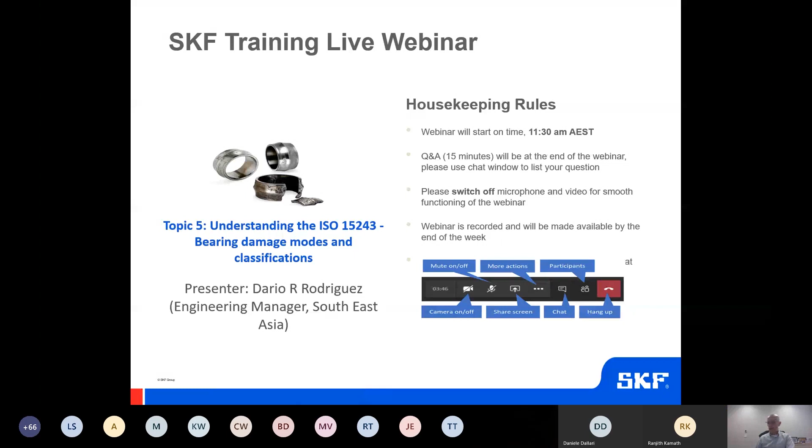Today we will have an introduction to bearing damage analysis, and we will use the ISO classification.

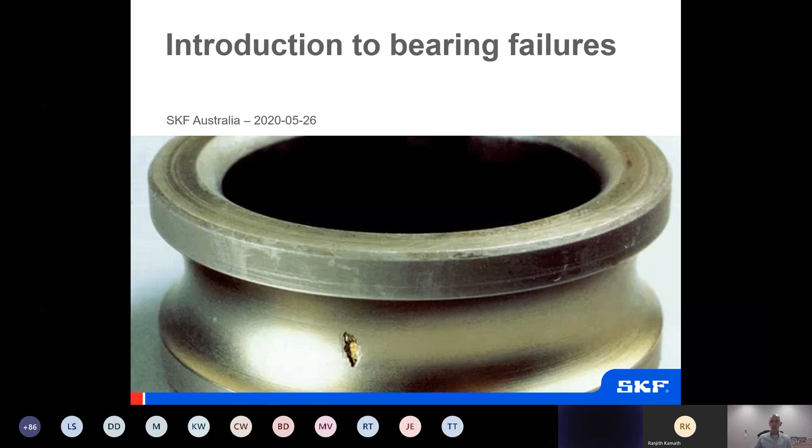When you look at bearing failures, I know this may sound a bit funny, but it's not a funny situation when you're facing failures on critical machines. This is basically one of many statistics you can see around regarding bearing failures.

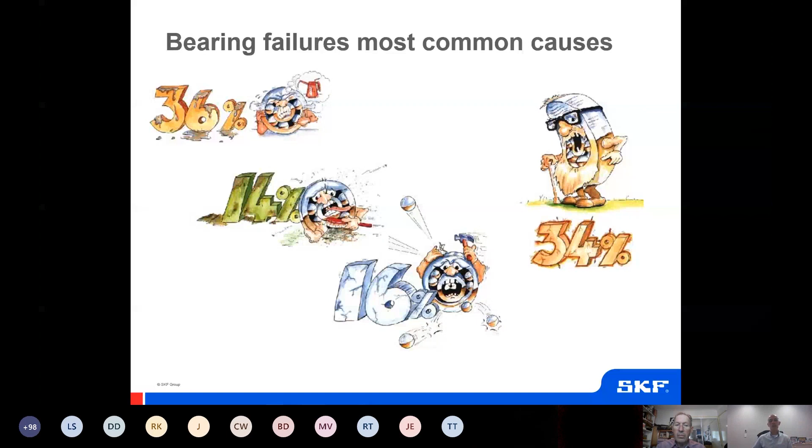Because of reasons other than the bearing manufacturing or its characteristics - whether related to lubrication, contamination, installation, and many other things. So there is a lot we can do to try to improve and solve some of these issues if we understand, when we look at the bearing, what is the most likely reason for the failure.

One of the things I want to be very clear about today, since we have such limited time, is that we won't be able to cover this as deeply and thoroughly as we'd like. But there are 2 takeaways from today's session. First, if it is too late, it's too late. Many times when we get bearings for analysis or investigation, the bearing is in such terrible condition that it's practically impossible to know how the failure started.

What we need to be aware of is that one initial failure will lead to a lot of consequential damage if you allow the bearing to continue to run. We all know that production pressure often won't allow us to stop the machine early enough when we detect the first indications of failure. But the longer we continue to run the bearing, the less likely we are to really understand what happened and what was the initial trigger. So that's one of the takeaways.

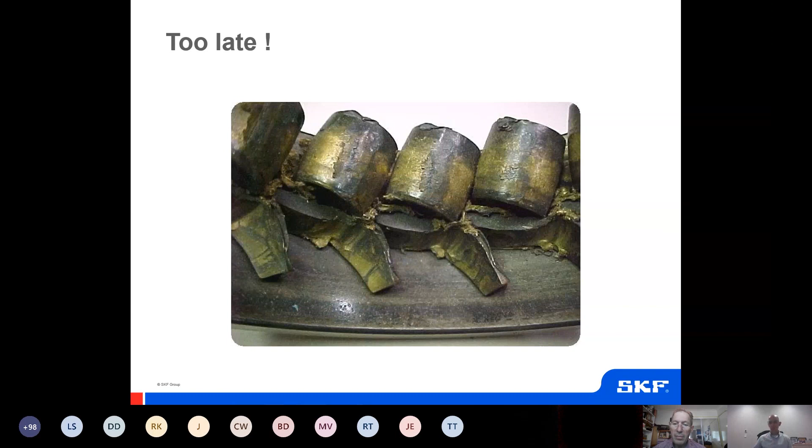You need to understand the bearing as part of a system, and many times indications or confirmations of a possible failure hypothesis can be found in the surrounding components. You need to look at the shaft, the housing, the seals - you need to look at the bearing as part of a system. Even when looking at one bearing failure on a motor or gearbox, that bearing is sitting on the shaft together with another bearing, most likely. You need to look at what happened with the other components, including the other bearing or bearings if there are more, because they might give you clues about what happened.

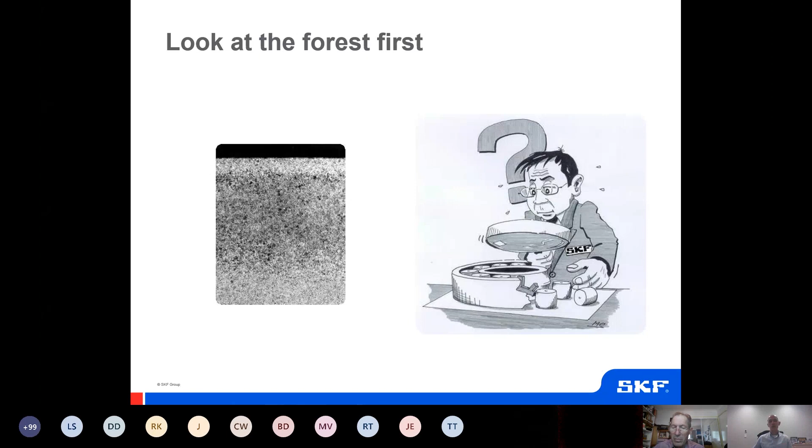One of the critical points to understand bearing failures is that you need to understand the bearing in itself, so you know what to look for. This sounds very basic, and you can say we can identify the bearing components and the different surfaces and features, but this is critical basic knowledge.

When you are looking at the bearing, you know what you are supposed to see and what might be considered normal, because when the bearing starts running, there will always be some kind of contact pattern between the rolling elements, whether balls or rollers, and the raceways, between the rolling elements and the cage, and between the rings and its supporting surfaces, the shaft or the housing.

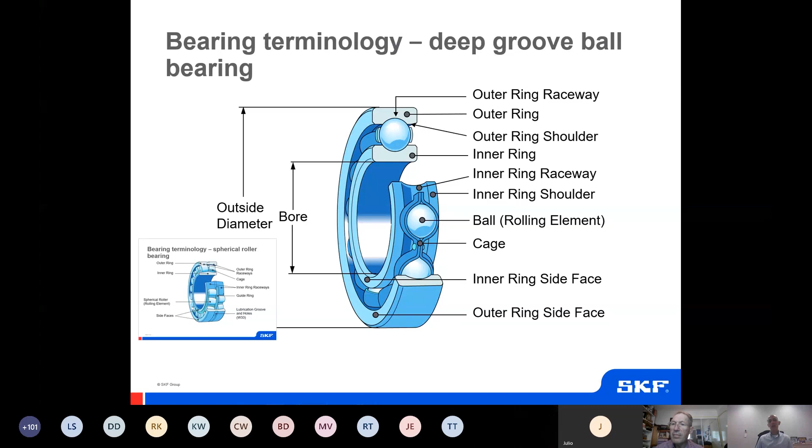So we need to have an idea of what is a normal contact pattern in which position, so we can then look at the bearing and see if what we are inspecting and evaluating makes sense in relation to what is the bearing design.

Different bearings have different numbers of components, so it's not enough to have a general understanding—sometimes even different manufacturers may have different design features. Even if the bearings look similar from the outside, they might have different internal features. You need to understand these differences to know what to look for, and again, what is a normal contact pattern from what is not.

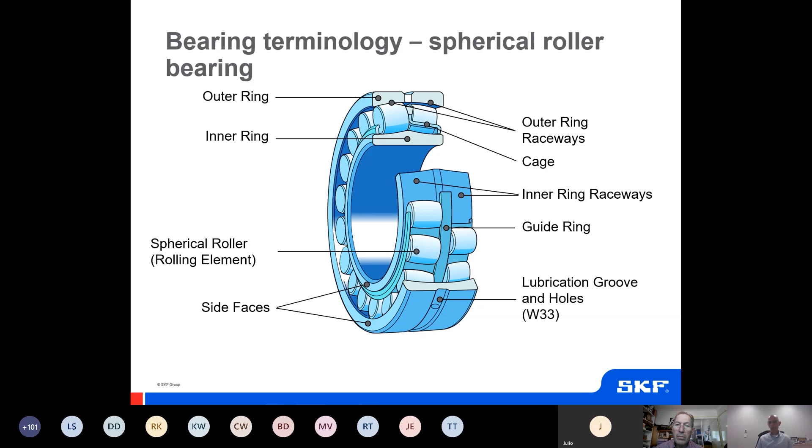This is an example of those features. You can have many different cage types, and even within the same bearing it might have different cage executions. What I mean is, they can have pressed steel cages, solid brass cages—what we call machined cages—or molded cages from polyamide and other synthetic materials. So that's one of the characteristics that you need to understand.

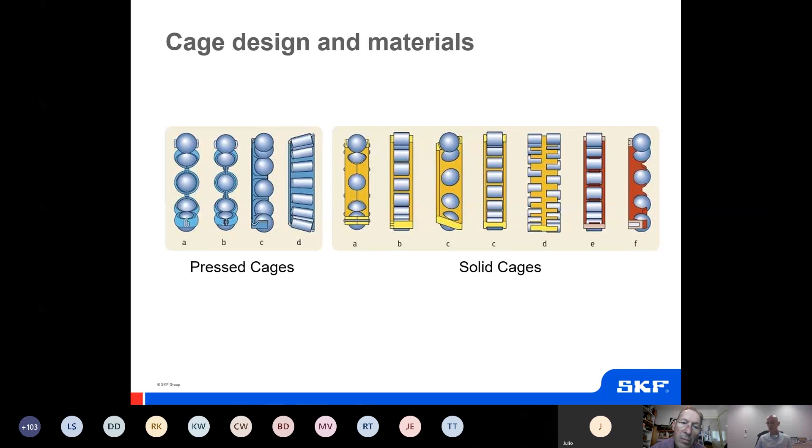Within the same bearing you can have different variants, and those variants may involve what is a cage execution. So it's not enough to know that the bearing has a brass cage—that brass cage in the same bearing can have different executions.

For example, it can be guided so the cage weight is supported by the rolling elements, meaning there should be no contact between the cage and the rings. That would be a small consideration when you see the cage—if there was contact with the surfaces on the rings, then there is an indication of a problem.

The same bearing can have an inner ring guided cage, meaning the weight of the cage is supported by the inner ring. There is of course some gap, not shown on the picture, but the weight of the cage goes around on the inner ring, or it can be guided on the outer ring. Those are features that are important to understand—again, what is supposed to be there, what is a normal contact pattern, and what is not.

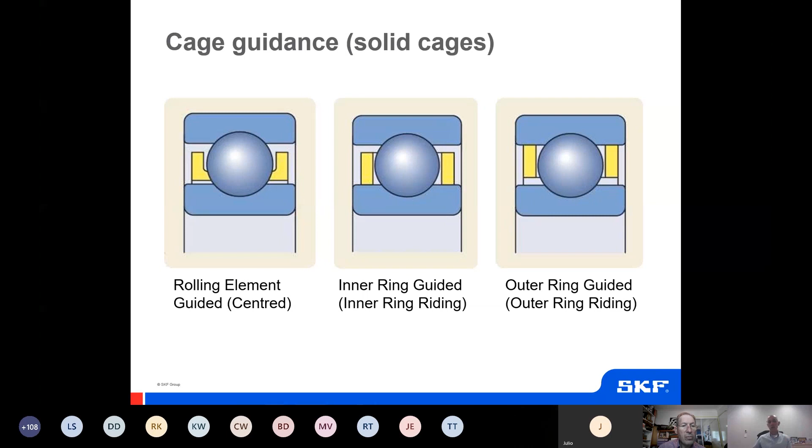Another consideration—and these are just a few examples of understanding your bearing and your application when looking at characteristics and features on a failed bearing—is that in most applications you will find a locating and a non-locating position.

This is also connected to what I said before, that you need to look at the bearing as part of a system. So let's say that you have a bearing that failed, and you think that one of the possible reasons for the failure is axial load being applied to the bearing.

If you look at the bearing in isolation, you need to answer—and might not be able to answer—whether that was the bearing in the locating or non-locating position, because the interpretation could be completely different. If you have an indication of axial loading on a bearing that is supposed to be non-locating, that's an indication that something is wrong, because that bearing is not supposed to take any axial load. So it's important to understand the bearing in the context of the application, to look for what is normal, what is supposed to be there, and what is not.

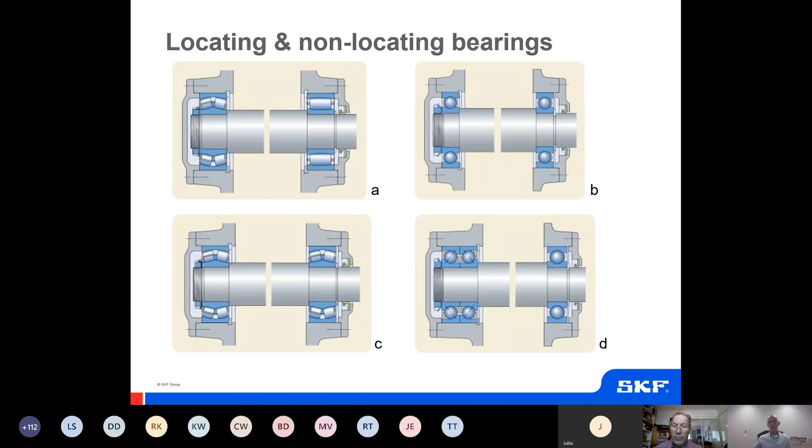These are just some basics, and I cannot go into more detail because of limited time. But let's look at some of the load patterns.

I was mentioning before that even under normal conditions, the bearing will develop some contact pattern under normal load, normal lubrication, in a normal environment. A typical bearing application might look like a rotating inner ring with a stationary outer ring, which means that with the remaining clearance inside the bearing, the inner ring moves around.

Do you see that? As soon as I put my...

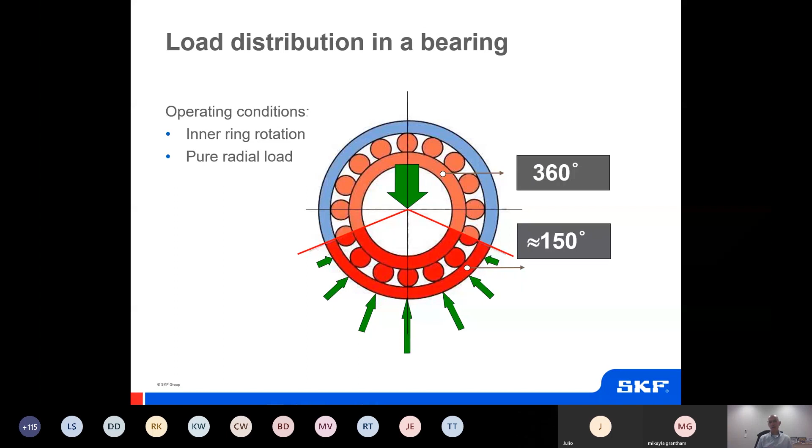I'll show just one example because of limited time. In this case, for that preceding condition, the rotating inner ring with a constant load direction, you will see that the contact pattern on the inner ring raceway of this ball bearing will cover 360 degrees. It will be centered because there is only radial load, no axial load being applied. So the contact should normally be in the center, and if it is not, that might be an indication that something is not as expected.

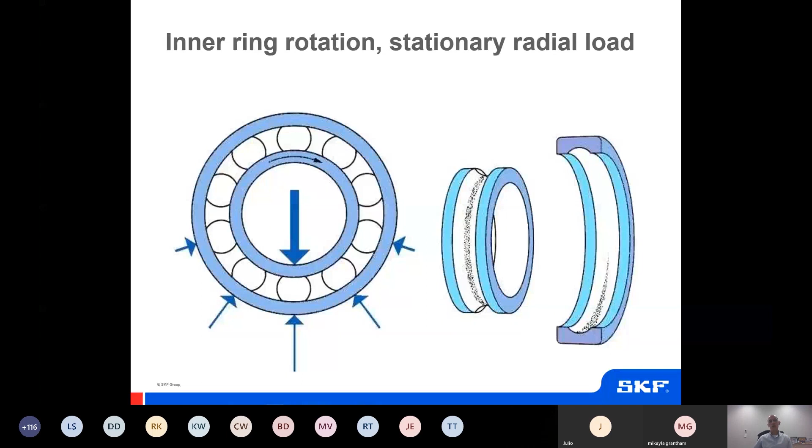And the outer ring, which is not rotating, should only have a contact pattern in the load area, which is not of constant width—wider in the area of maximum load and thinner as you move in or out of the loaded zone. So that is what is expected to be normal in an inner ring rotation with a constant load direction and a constant load. This is a very simple example of such a condition.

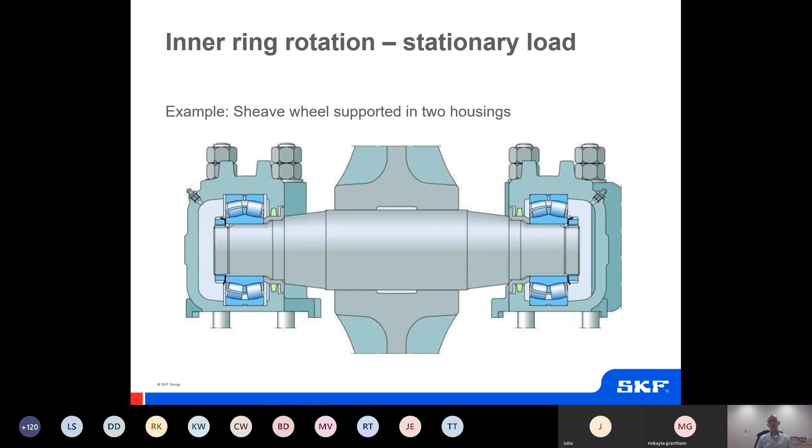So that's just one example of an application where you will see something like that. You can apply this kind of logic to any of your machines. Of course it means you need to understand the loading type and conditions—whether it's a constant direction, a changing direction, or a rotating load like in a vibrating screen. You need that understanding to connect it with the load pattern you see on the bearing. And there are many other possible situations and combinations, like outer ring rotation.

If you have outer ring rotation and a stationary inner ring, the logic will change—you will see a contact pattern all around the outer ring and only on one part of the inner ring. You can have a bearing supporting axial load and not radial load, like sometimes happens on a vertical shaft. But it can also be a dominant axial load on a horizontal shaft, and then the bearing supporting that axial load will experience a contact pattern all around on both rings.

You can have combined loads, more radial or more axial, and that will change the contact pattern on the inner and outer rings, also depending on which one is rotating and which one is stationary. This is basic, common sense, but we need these considerations to connect what we see on the bearing with the application.

And I highlighted in red here also contact patterns that apply to situations indicating a failure already—for example, when the outer ring of a bearing is misaligned with the inner ring. In those situations, you have an indication already in the contact pattern that there is a problem. When I'm talking about misaligned rings here, it does not mean misalignment between the driven and drive shaft. This misalignment can happen within the bearing itself, due to a lack of concentricity and coplanarity within the bearing, for example between the shaft seat and the housing seat.

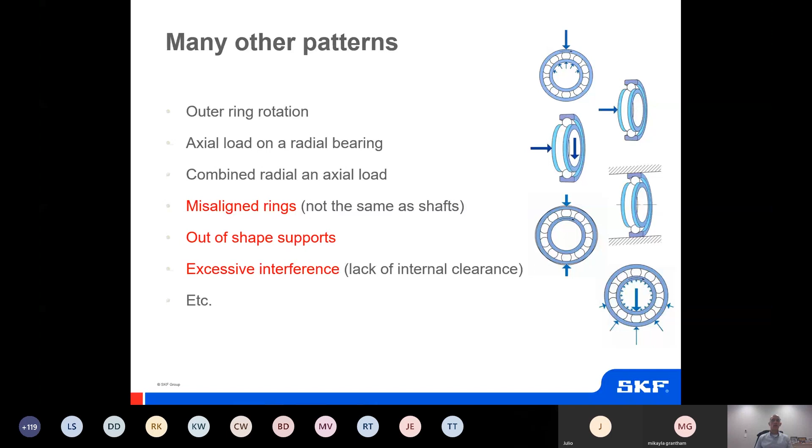So let's look a bit at this ISO 15243. The last edition is from 2017. This failure classification was developed, as happens with many other ISO committees, by participants of the bearing industry—ourselves, SKF, and other bearing manufacturers have representatives in this committee. There was a need to develop a common language, because customers were having different interpretations and different naming conventions for the same failures.

So the main idea of this ISO classification was to say there are a number of failures that can be identified with simple tools by visual inspection, without detailed material investigations or laboratory analysis, that we need to agree on how to call them. So when somebody makes an investigation and refers to a failure, others can understand what we are identifying. That was the main reason for this ISO failure classification, but by no means does this cover everything.

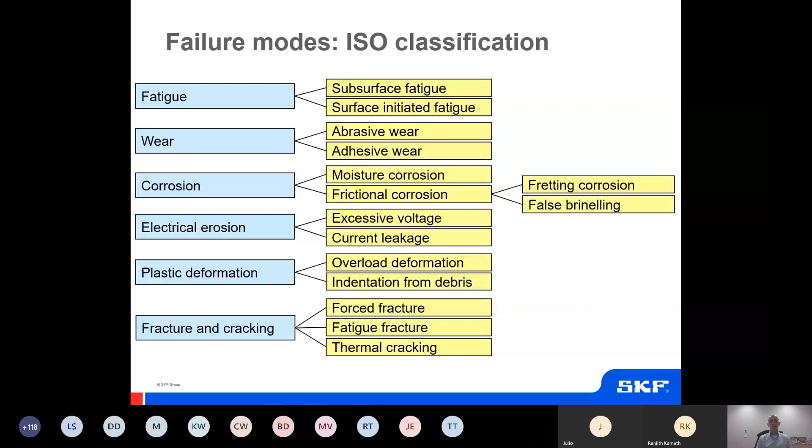What we did here was to help identify things, because sometimes we show a picture of a ring, or only part of a ring. So we put the image on the bearing type to make sure we understand which bearing we are talking about for the different failure types.

I have to say this is something built on experience. You need to understand the bearing, you need to understand a bit of the theory behind bearings, but it's a lot about experience and visual recognition. When you see something and understand what caused it, it will be easier to recognize the same thing again.

So the first type is subsurface initiated fatigue, which is the basis of the bearing life. When you look at how bearings are selected, they are selected based on a certain load and speed combination, and the reasoning behind that bearing selection is the life calculation.

The life calculation is based on this subsurface initiated fatigue. So you can say that if a bearing has failed because it reached the end of its life, it might look—at the very beginning, a bearing that has been running well lubricated in a clean environment with the right loading at the appropriate speed, in relation to the size and type of bearing—it might develop spalling, the first indication.

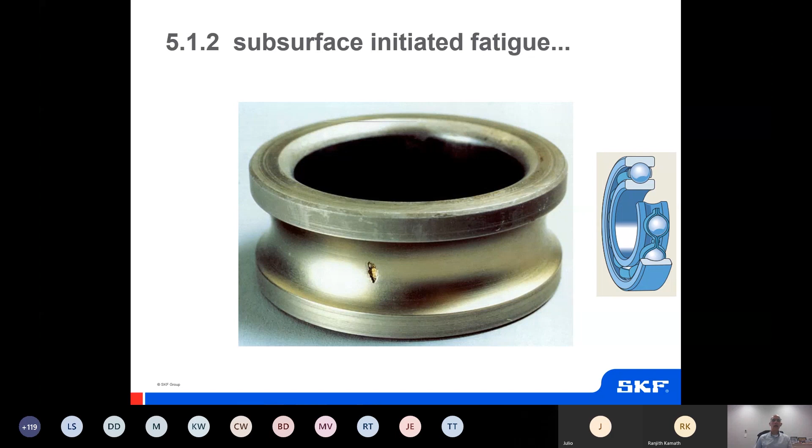And of course, when you talk about subsurface initiated fatigue, it's not always necessarily an indication that it's normal, that this is what is supposed to happen to the bearing. Because if you are overloading, or you install your bearing—in this case the outer ring of a deep groove ball bearing that we show here—

In this case, the housing was deformed and kind of oval. So there were two areas, 180 degrees apart, that you see reflected in the mirror image on this side of the ring. You see there are two areas 180 degrees apart where there is damage.

So there is an ovalized housing, and that created more stress on the bearing, more internal loading. It's not the loading from your machine, it's the loading created because of this particular condition, and that increases stress on the material and accelerates the subsurface fatigue. Because at the end of the day, subsurface fatigue is a consequence of the stress level and the number of cycles. So you could accelerate what is expected to be the normal life of the bearing, which ends up being short. That can also happen.

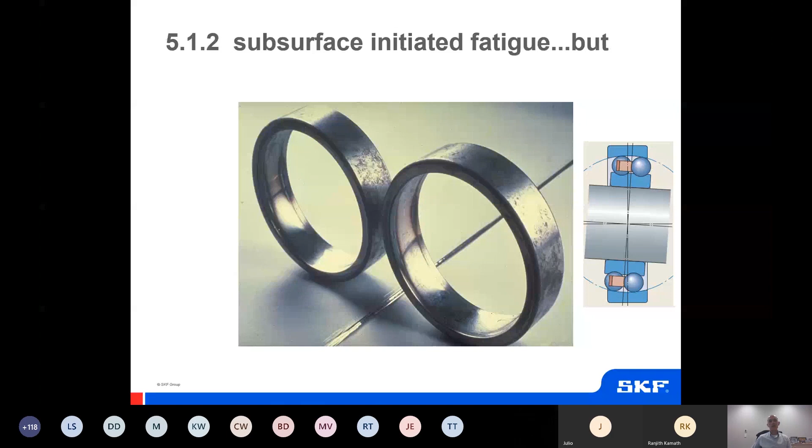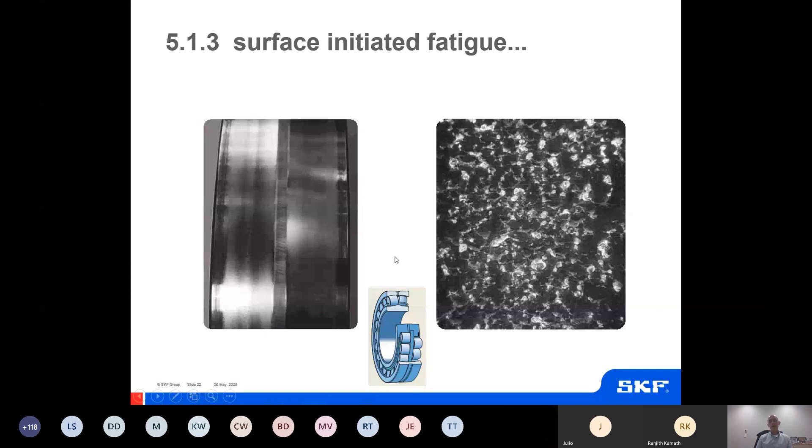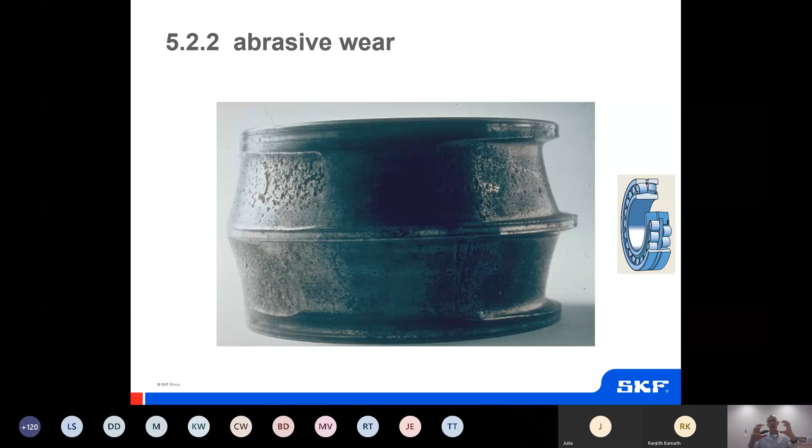Again, look at the bearing, understand the bearing features and operating conditions, and look for confirmation, because what you will normally do is develop a certain hypothesis, but you need to confirm it. In this case, confirmation might come from lubricant analysis, which will be contaminated with material from the bearing itself, no doubt, but there will also be evidence of external contamination in the lubricant around, maybe not the one that was inside the bearing itself.

Abrasive wear - if you look at this deep groove ball bearing, this is of course the cage only and some of the balls of this bearing with a brass cage, and you see that the cage has been split in two when it should be one piece. So when you have this type of failure mode, there is no doubt that in many cases the element that will fail first is the cage, which is the softer, weaker element in the bearing. So if you have a worn out cage, you have a very high probability that you have a contaminated environment, and that's one of the consequences.

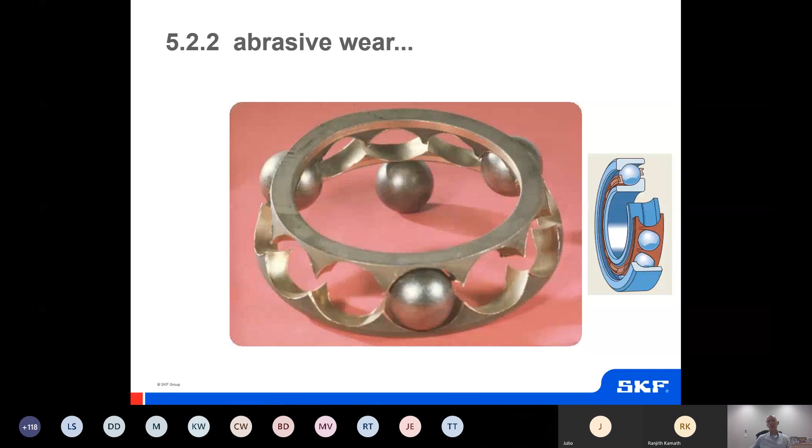Again, you will see a wear pattern on your rolling elements and raceways, but they are much harder, so they will take longer to develop a wear pattern. And there is another one within the same ISO classification, abrasive wear - something we would call more polishing wear. Again, this is the inner ring of a spherical roller bearing.

And you see these very shiny, mirror-like surfaces. In this case, also with a lot of bands - circumferential bands in different positions along the raceways. As you see in the image, we have two rows of rollers, and both are showing this mixture of very shiny surfaces with some other circular bands, maybe brown, maybe a bit darker.

What you need to consider is that this is also related to an initial stage of lubrication collapse, and there is too much metal-to-metal contact. In this case, you can say we will probably end up later in a situation of surface distress or surface-initiated fatigue. But in this particular case, the initial stage is that the surfaces get polished by themselves. So there is some lubricant, but it's too thin and it's not able to protect the surfaces.

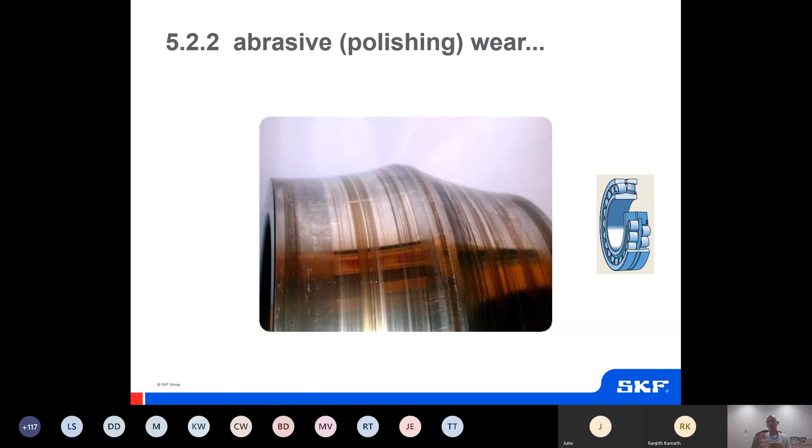What you also need to consider here when you think about these circular bands is that the rollers are not only in contact with the raceway, but are in contact with the cage and with the guide ring. So there is a transfer of different contact patterns between the different components inside the bearing, and sometimes what you see is a mixture of these different interactions within the bearing.

There is another classification of this ISO standard, which is called adhesive wear. In this case, what we see on the image is just part of the outer ring of another spherical roller bearing. It's difficult to see at this scale in the picture, but there is a very rough surface that starts, and when you look at the bearing and know what was the position of this ring on your machine, you can see that this is the area where the rollers are starting to get loaded.

That's also an important indication that when you look at the bearing and want to understand what is happening, you need to identify the position, the load area. So that means, as we mentioned in our previous session on bearing failures, you need to identify the position of your ring on the machine, the position of the inner ring on the shaft, the position of the outer ring on the housing.

Then you can make a correlation if, let's say, the load is acting downwards and this area was at a certain angle, let's say around 60 degrees from the vertical position. Then you can say, okay, it makes a lot of sense that this is at the start of the load area.

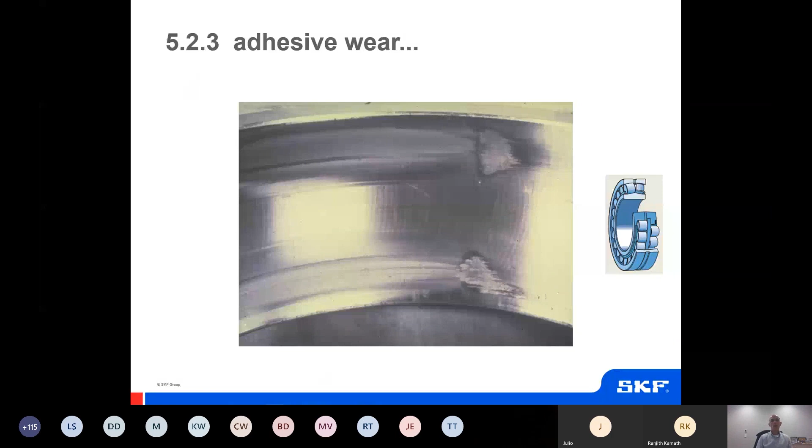This wear can also happen, and I would say is even more common, on bearings that have flanges. For example, the taper roller bearings or the cylindrical roller bearings that have flanges, which are needed to guide the rollers. But if these surfaces are not very well lubricated, they will suffer from this adhesive wear process.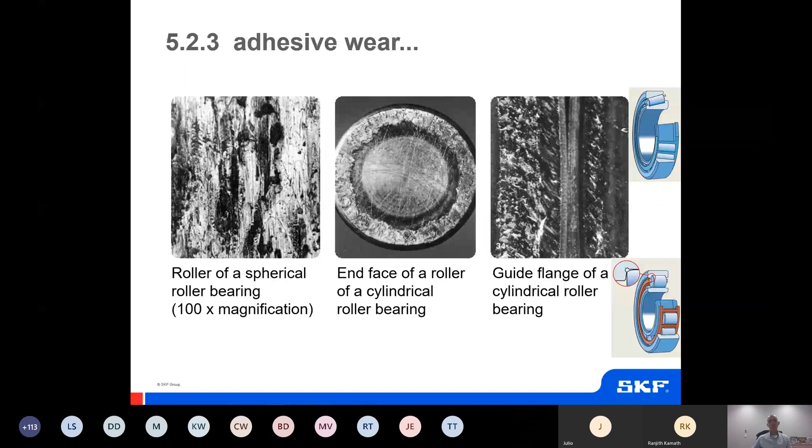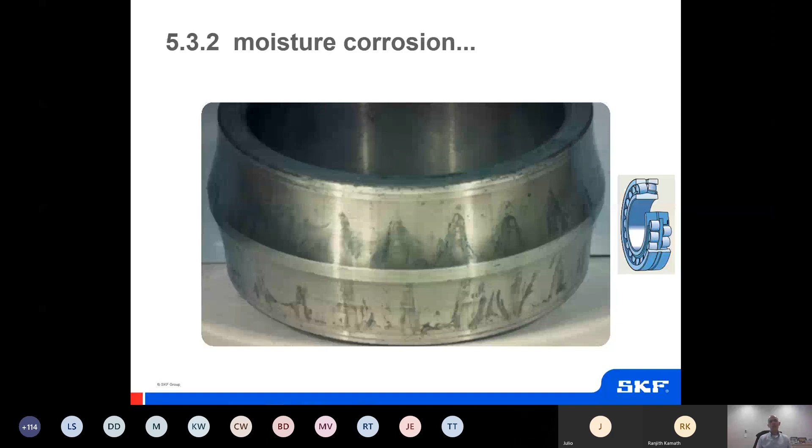Can moisture corrosion develop also when the bearing is running? Of course, but it will be more randomly distributed, because there isn't enough time for the water to deposit on the running surfaces—it deposits more on the stationary surfaces for the corrosion to take place.

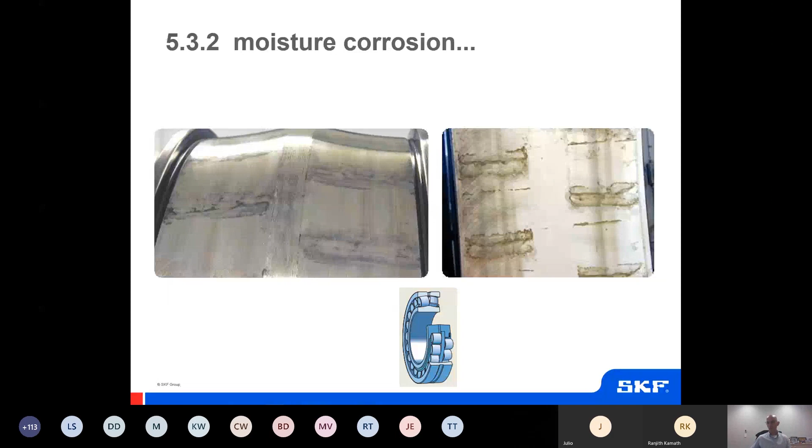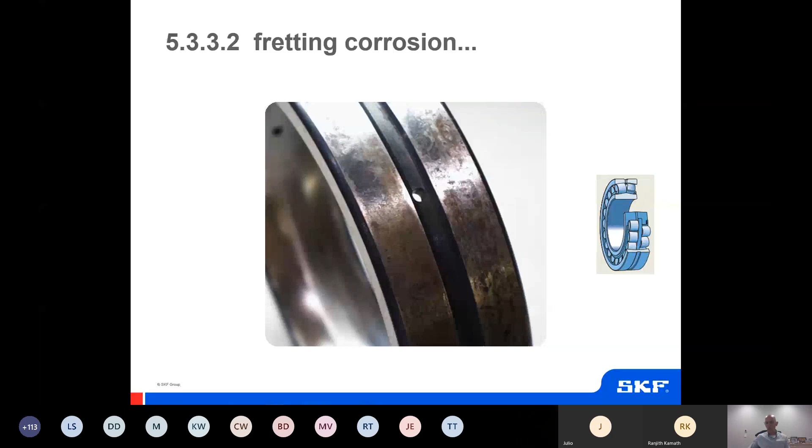More examples of fretting corrosion, starting exactly in the load zone.

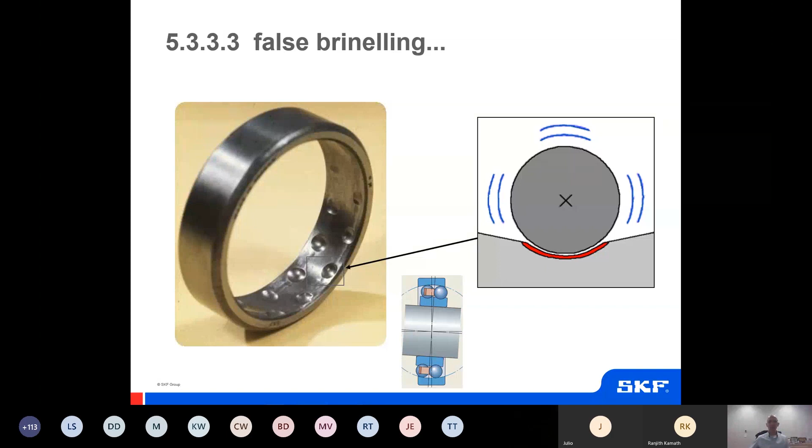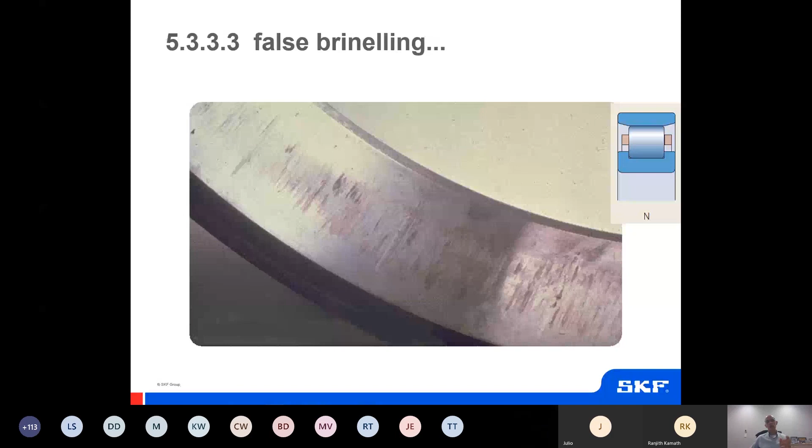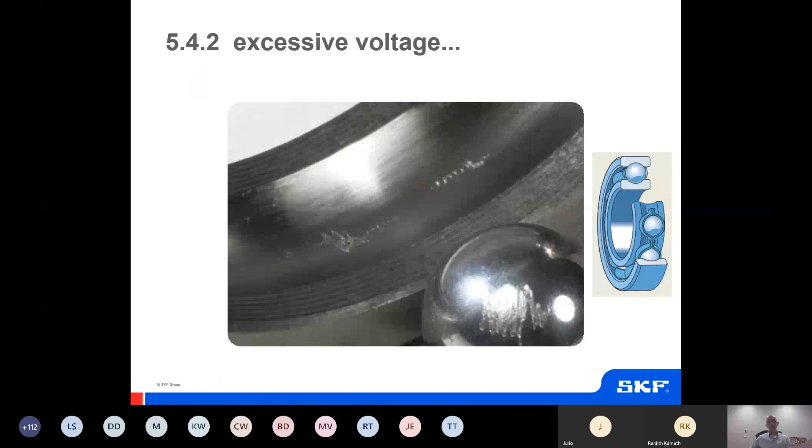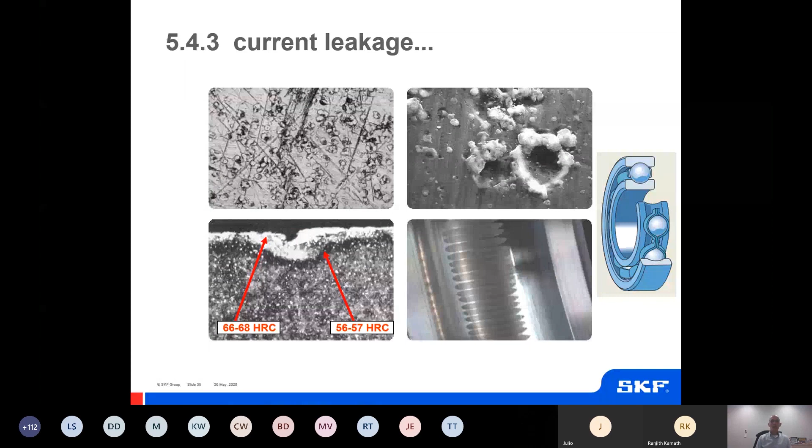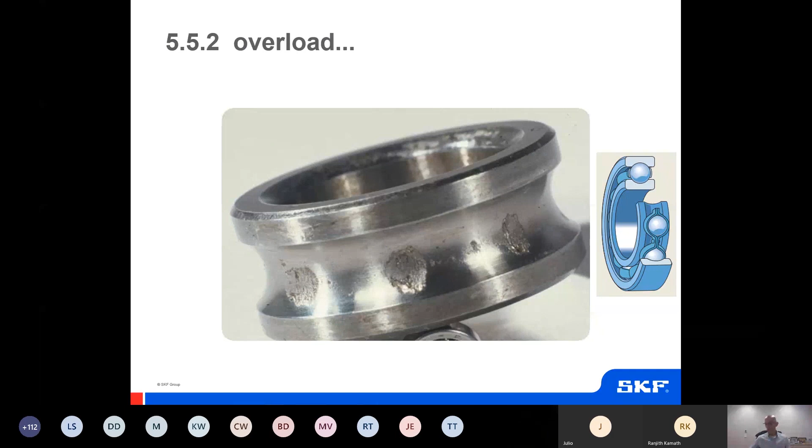Remember we discussed abrasive wear, and I was also talking about contamination there, but in that case it's probably very small particles in large numbers that turn your lubricant into an abrasive paste. Here we see maybe a smaller amount of particles, maybe bigger, and they create indentations where stress will increase and eventually develop into fatigue.

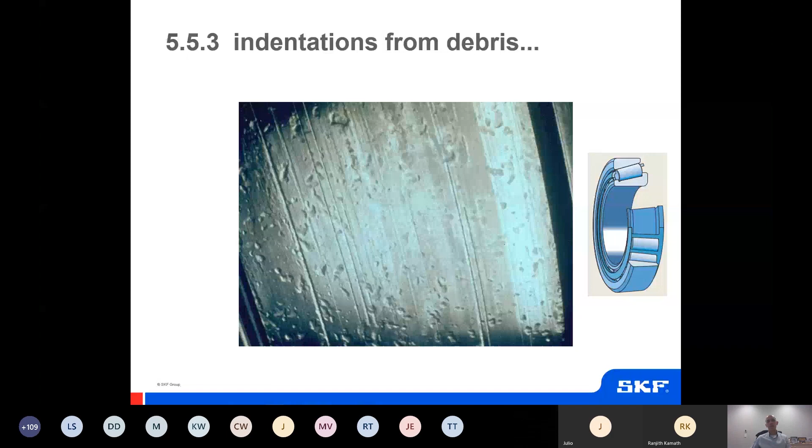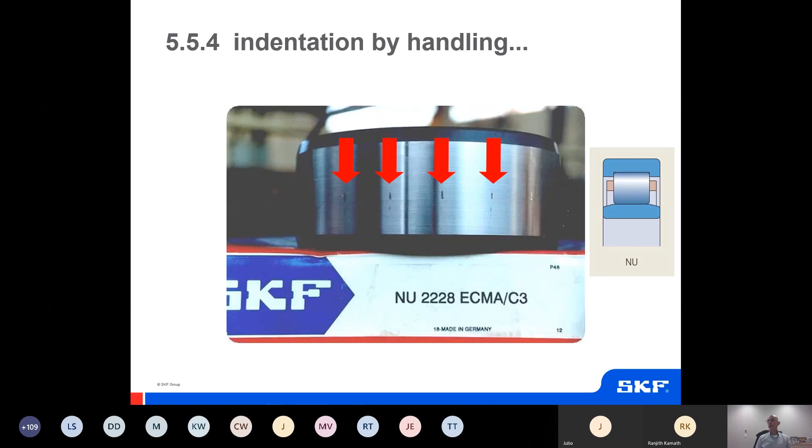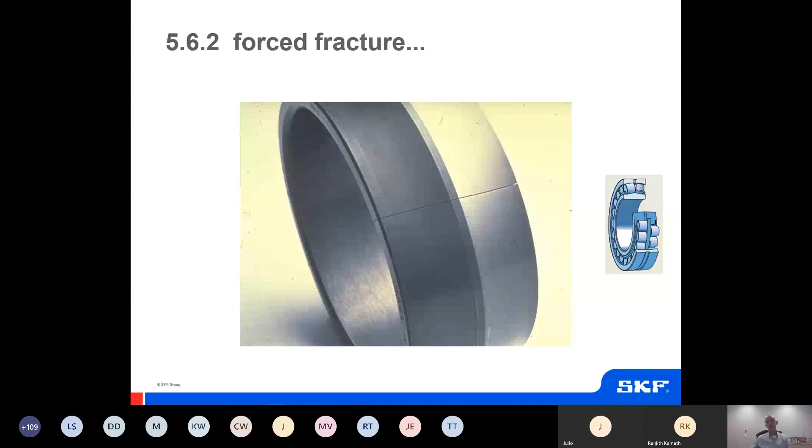So in the previous example, the fracture was a consequence of the oversized shaft. In this case, it's a consequence of fatigue.

So we saw the inner ring, we saw this area of damage, and then we started looking a bit more carefully. On the side of the fracture, when you see the side face, you see there is an area of interest, some pattern that is not visible from the top. So there was an additional fracture.

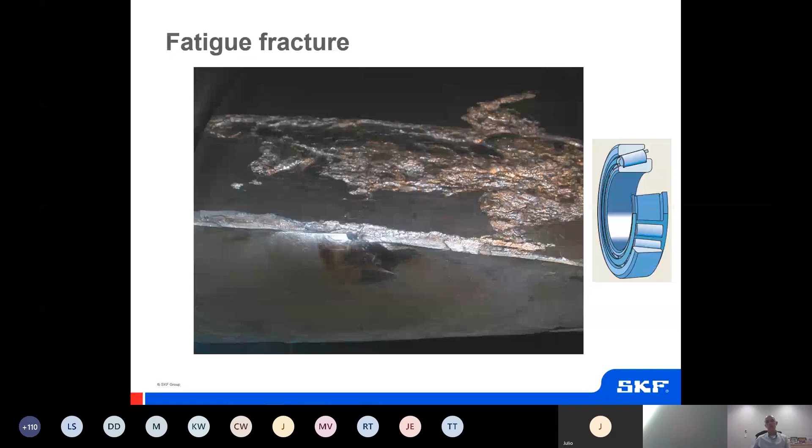So we remove one part of the ring here, like this. There was an additional fracture here. Then we use that to our advantage to remove that part. And then this is what we saw.

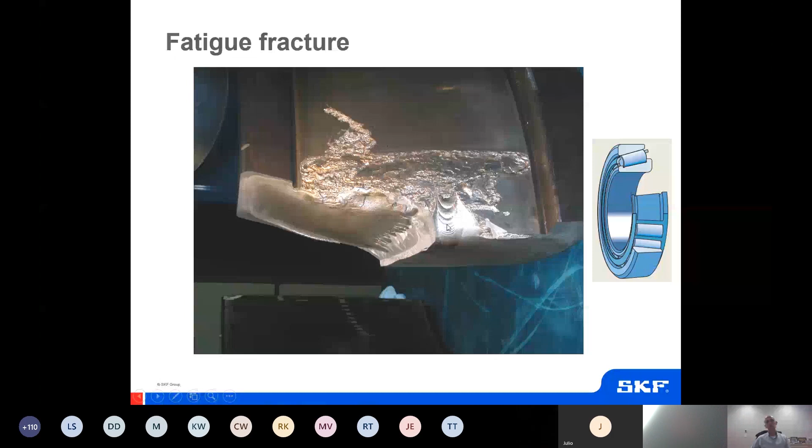So basically, you see these beach-like marks that are a clear indication that the crack started from fatigue, and it's typical that it starts growing in horizontal fashion below the surface, and then at some point it starts to go into the material and finally develops into a full fracture. So basically a fracture initiated from a fatigue or spalling area.

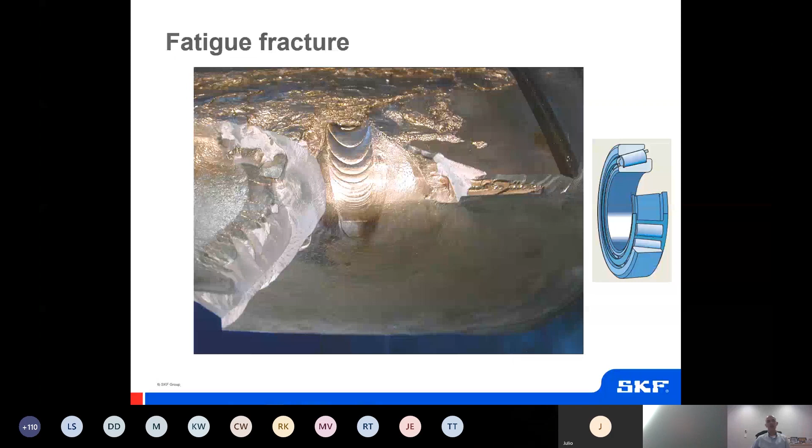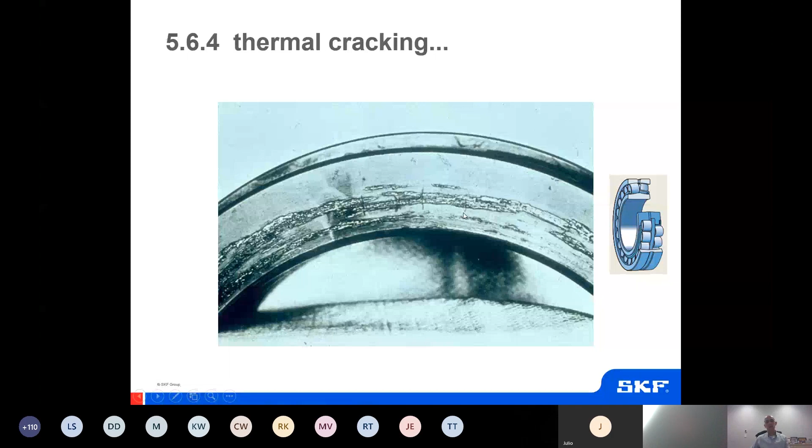So these are, again, some quick examples of typical failures for bearings. But I cannot insist enough on looking at the bearing as a system, and part of that system is also the lubricant. So analyzing the lubricant, having samples of the new lubricant and the used lubricant, and testing the lubricant might also help to understand what has happened and confirm eventual hypotheses of your failure.

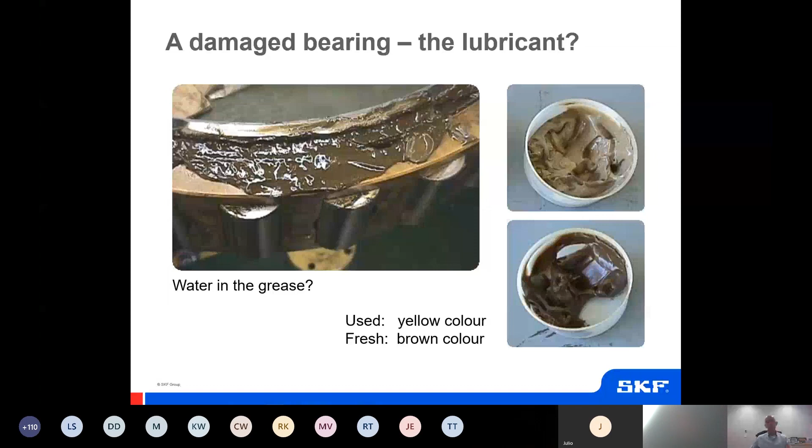Last point here is that there is material. We are going to be sending you a brochure, a catalog type of publication that talks about this in greater detail. That would be a very good reference, and it can be downloaded from our webpage, so we can send you a link to that for your reference.

You can also buy the international standard, ISO 15243. Our publication is very much a one-to-one relationship to it, but you need to buy this from the ISO webpage, and there is more material.

Absolutely, you can search the web and find a lot of other publications about bearing failures and Hertzian contact failures, like this atlas that was written by a former SKF colleague many years ago. A very good publication.

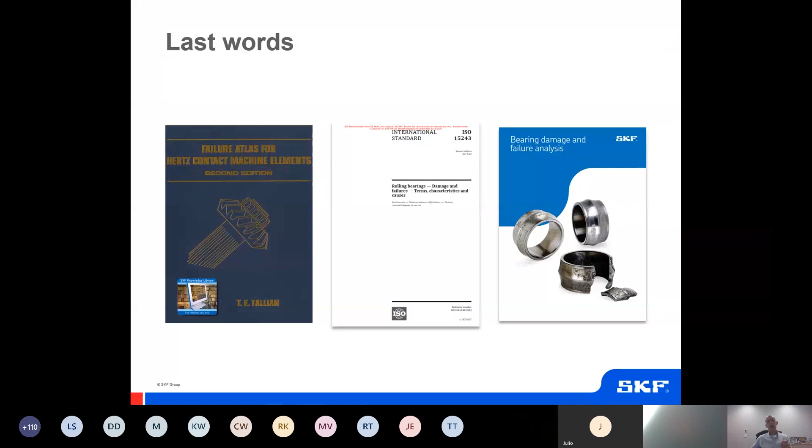This is information you can use in your investigations. And last but not least, don't wait too much, because when you let the bearing run so far, then it's almost like you need a crystal ball to really understand what the failure was.

We see it very frequently, and many times we have to apologize. My message to you guys is, if you have a bearing in this condition and somebody tells you 'oh, this is the problem,' I would say don't trust it too much, because it's almost impossible without all the records of every parameter during operation to know exactly what changed, why it changed, and what was the origin of the failure because of all the consequential damage.

One more comment: when you look at the ISO criteria, it's talking about visible change of appearance. So be careful not to force what you see on the bearing to match the categories of the ISO. That's not the objective. If there's a clear relationship, okay, but if you don't find the connection, that's also fine — you need to investigate more to understand your failure. So the ISO is just a guideline for the most obvious cases, but it doesn't explain everything.

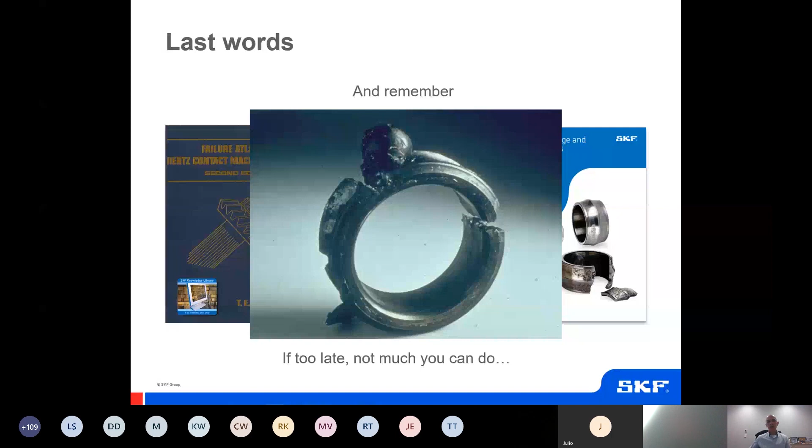So, if I can say something, how do you become good at bearing failure analysis? First, this is something you learn by doing it — there's no question, you can have the bibliography, but you actually need to see the bearings. Second, you probably need practice. And third, practice. There is no other way, guys.